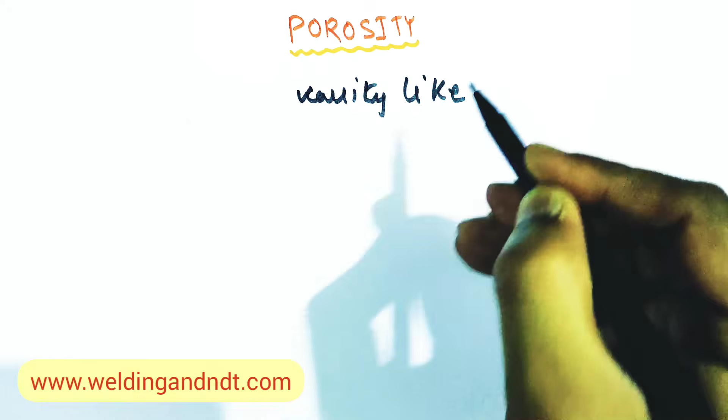Our today's topic is porosity. Porosity is a welding defect, and it is like a cavity - a cavity-like discontinuity formed due to entrapped gases in the molten weld pool.

So suppose this is the drawing of welding. During welding, this weld pool is in the molten stage, and gradually it cools or solidifies. During this solidification process, if some gases are entrapped in the molten weld pool, they remain here itself and form porosity.

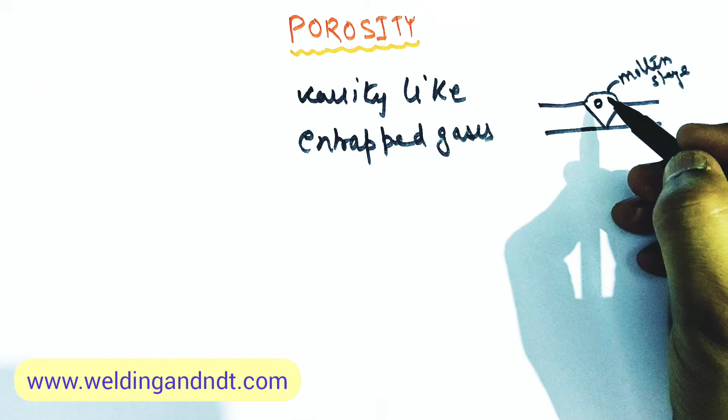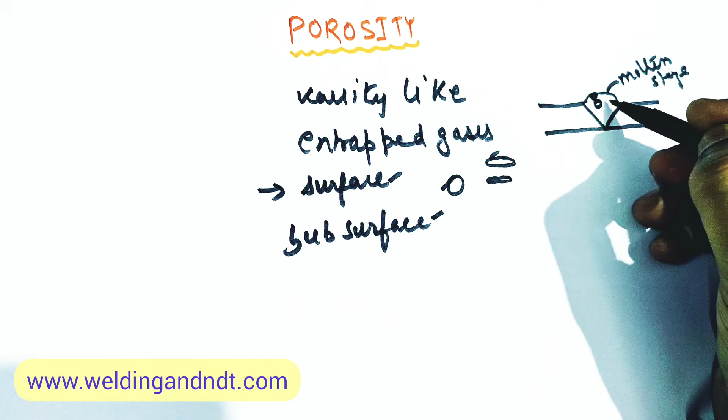This porosity is generally in spherical shape, but it may be elongated also, like this. So it can be spherical or elongated. And a very important thing is that this porosity occurs on the surface or subsurface mostly - at the surface the cavity will be formed, or right below the surface the cavity will be formed.

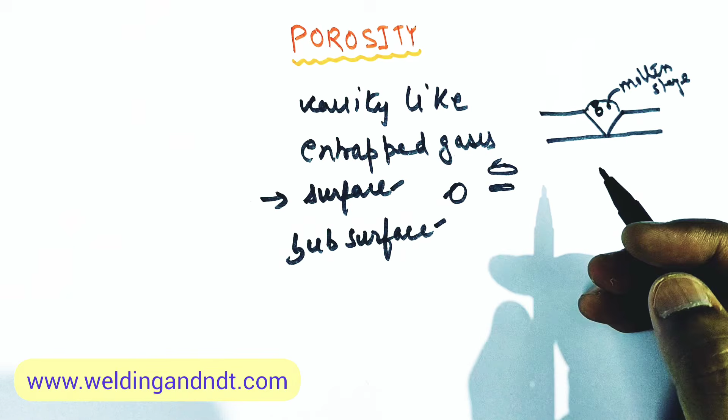So what are the gases which are generally entrapped? That I will tell you. The gases which are entrapped are mostly hydrogen. Hydrogen is the main gas which forms porosity, meaning most porosity is a result of entrapment of hydrogen gas.

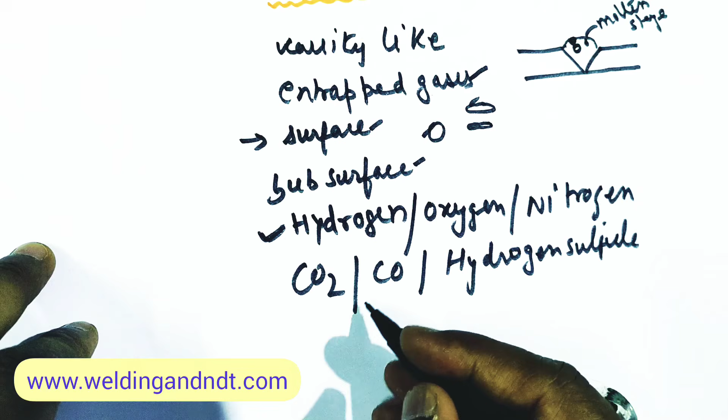Along with hydrogen, some other gases also cause porosity in the weld metal - that is oxygen, nitrogen, carbon dioxide CO2, carbon monoxide CO, hydrogen sulfide H2S, then argon and helium. These are the principal gases which cause porosity in the molten weld pool.

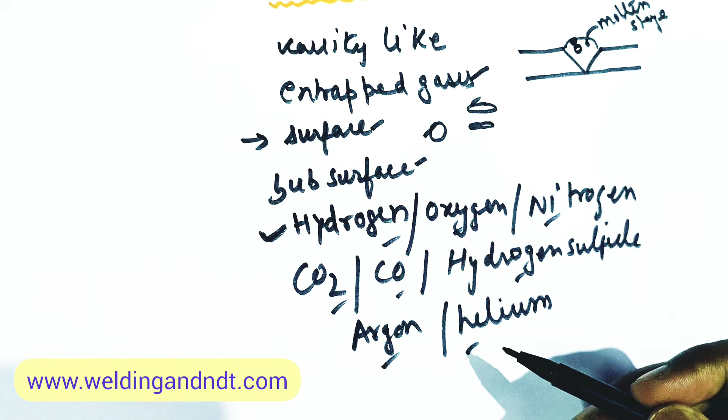As I told you, this hydrogen gas is the major cause of porosity. So please remember this - hydrogen gas is the major cause of porosity.

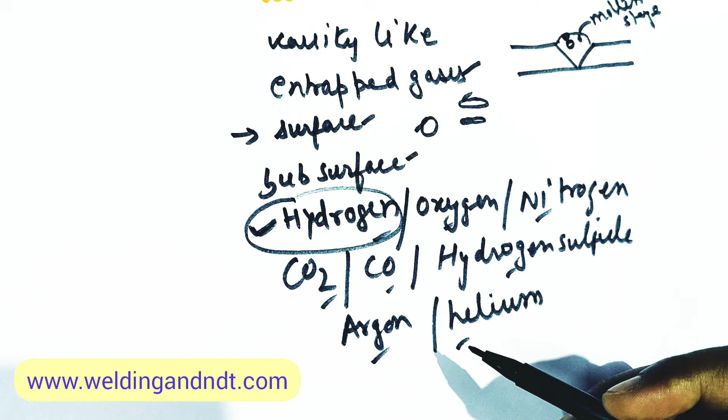Now friends, we'll discuss two more things. One is the types of porosity. There are 5 different types of porosity. I'll name those. First type of porosity is scattered porosity.

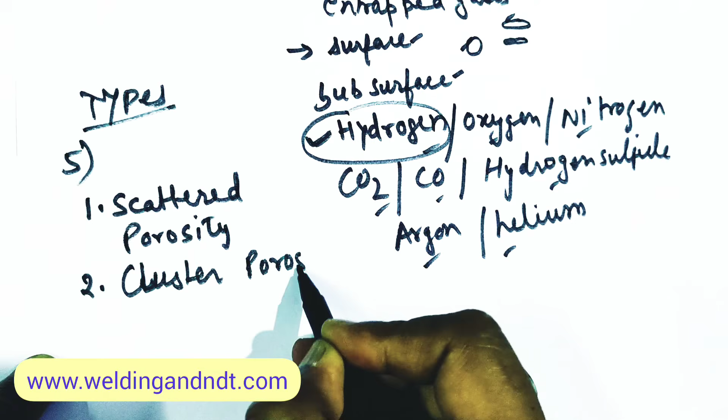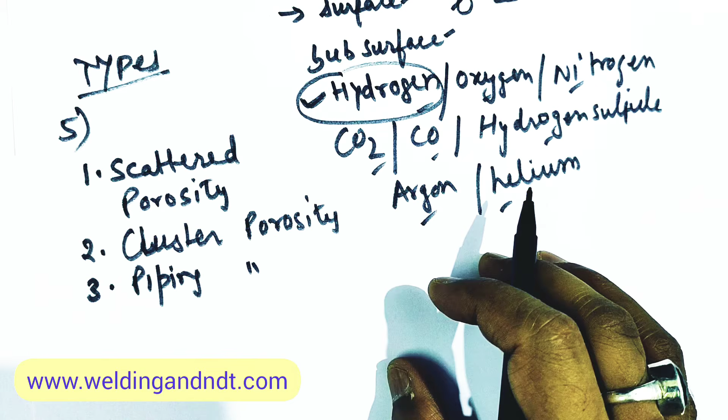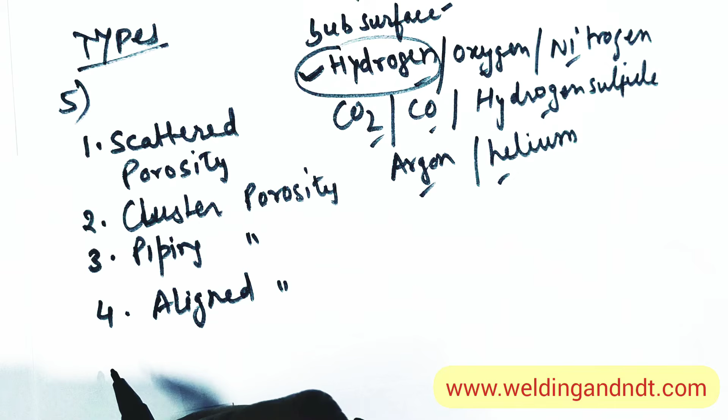Scattered porosity. The second type of porosity is cluster porosity. The third type is piping porosity. The fourth type is aligned porosity. And the fifth and last type is elongated porosity.

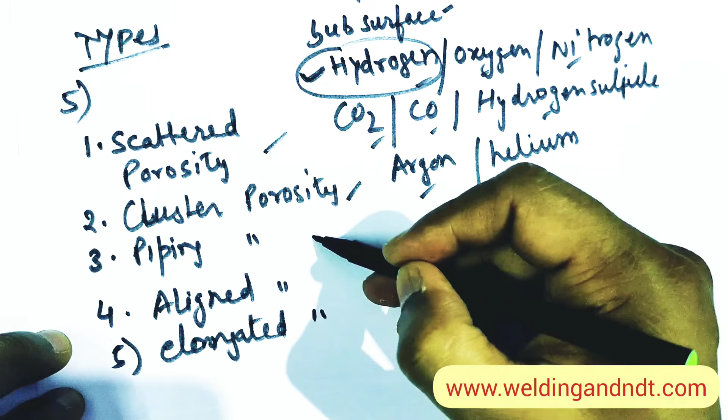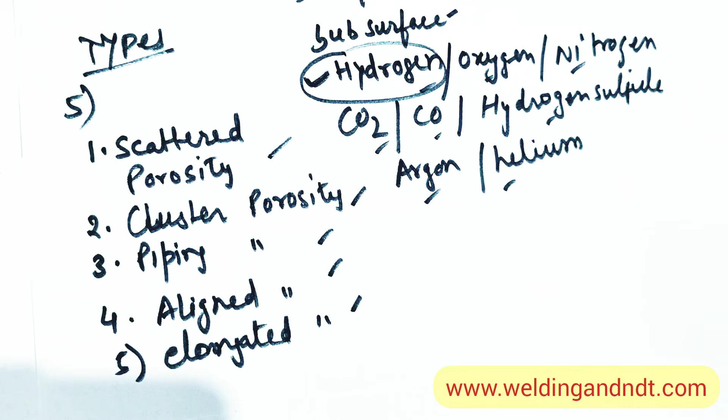So these are the 5 types of porosity which occur in a molten weld pool. I'll explain these porosities also, but first let me explain the causes and remedies of porosity, then I'll explain these 5 types.

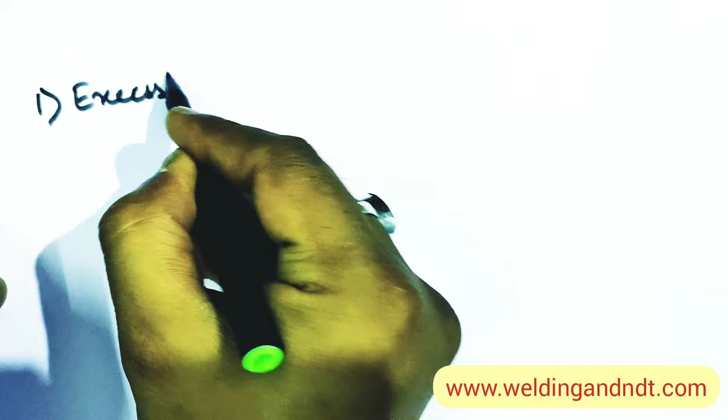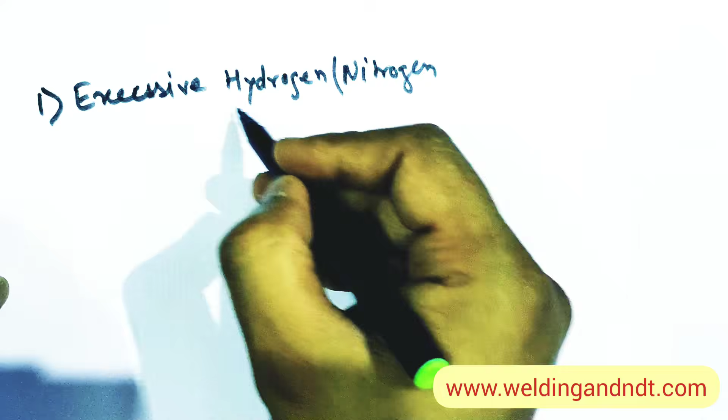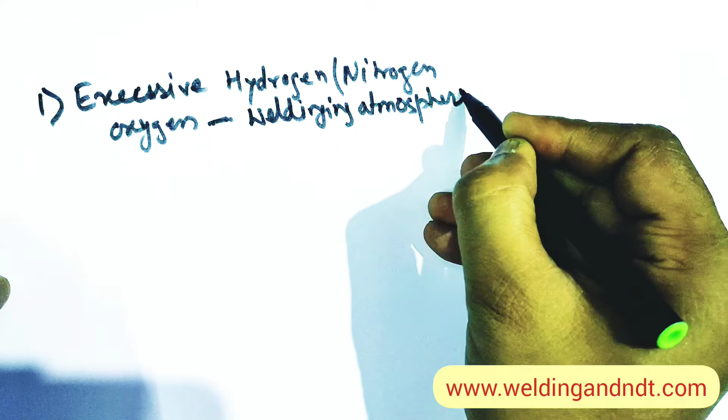So the first cause is excessive gases like hydrogen, nitrogen or oxygen in the atmosphere or in the welding atmosphere. At the position where we are doing the welding, if there is excessive hydrogen, nitrogen or oxygen, then chances of porosity will be there.

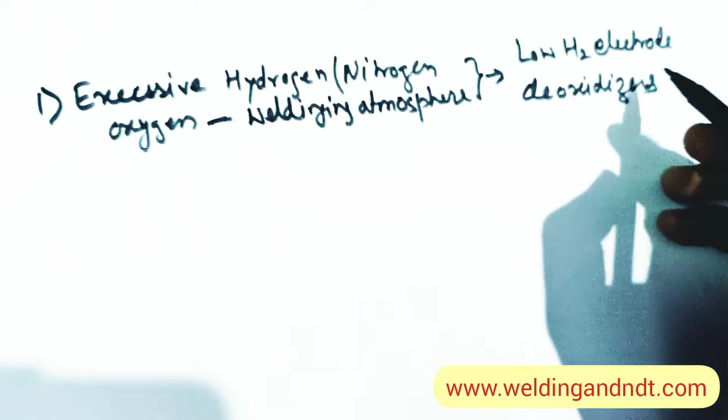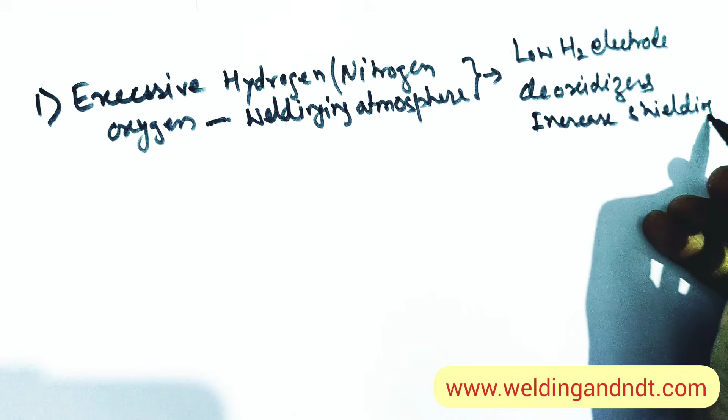Now what are the remedies for this? To avoid this, we can use low hydrogen electrode. We can also use other filler metals which are high in deoxidizers. And we can also increase the shielding gas - by increasing the shielding gas, we can remove the excess hydrogen, nitrogen or oxygen present in the atmosphere.

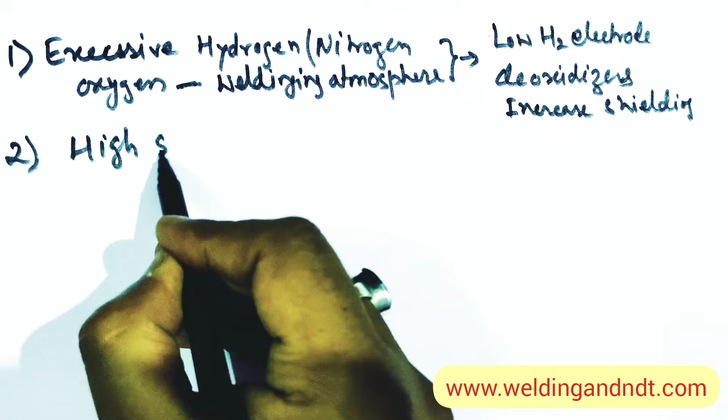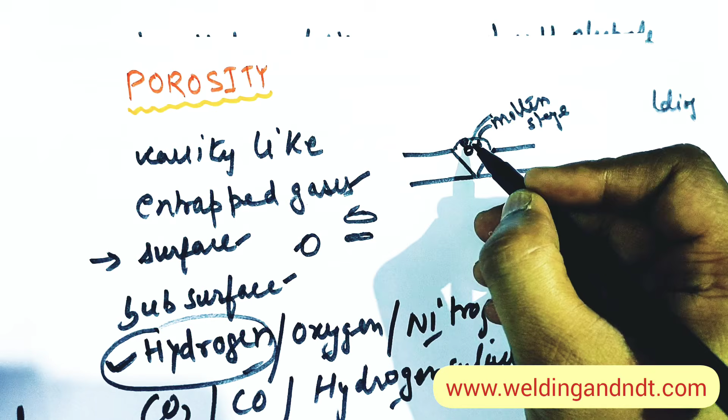The second cause is high solidification rate. If I say high solidification rate, it is like - suppose some gas is entrapped in the molten weld pool, this gas tries to escape. If this weld pool remains molten for a long period of time, the gas will automatically escape and chances of porosity will be less. But if it solidifies very fast, then this molten weld pool or entrapped gases will not get a chance to escape.

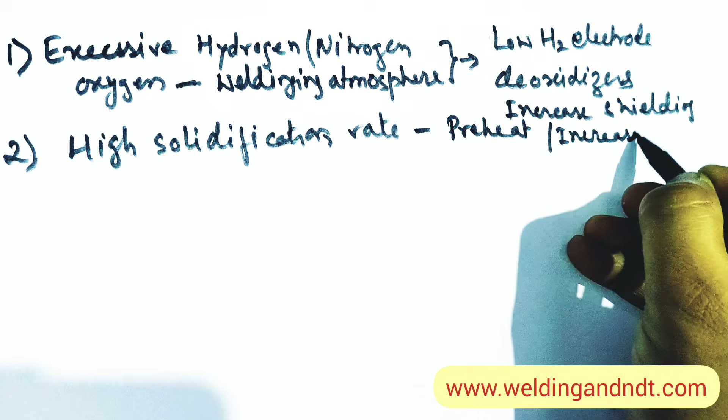So high solidification rate is one of the causes, and the remedy for this is preheat. Either we can preheat or we can increase the heat input, so by increasing heat input, we can avoid this.

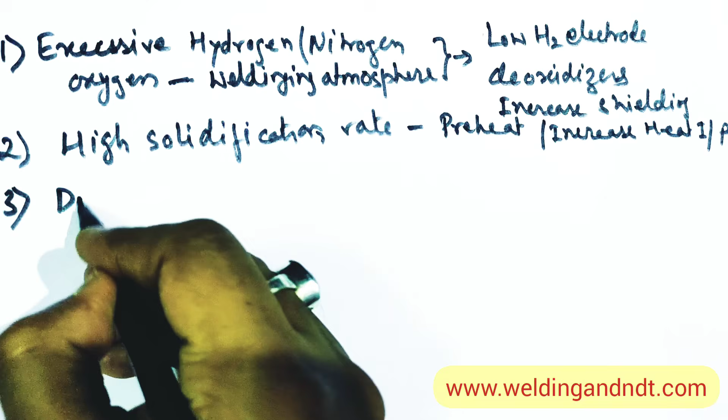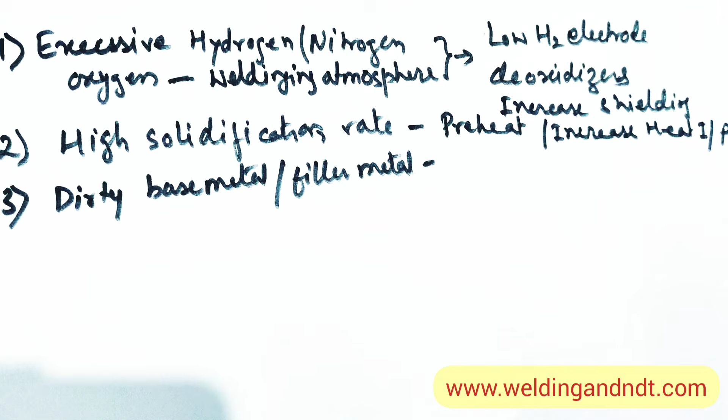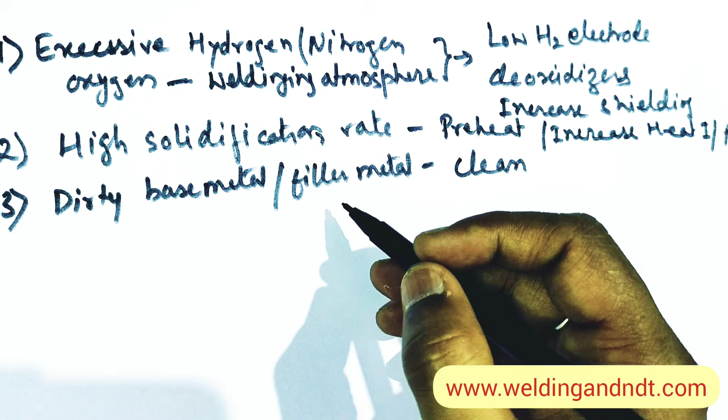The third cause is dirty base metal or filler metal. The filler metal or base metal which we are doing the welding with might be dirty, not clean. Some compounds will be there which form gases, and those gases will be entrapped. So we have to clean the base metal as well as check the filler metal, that it should be free from dirt, grease, every foreign material. The remedy is to clean before welding, clean the joint faces, and in case of filler metal, use packaged filler wire, stored in a very confined place.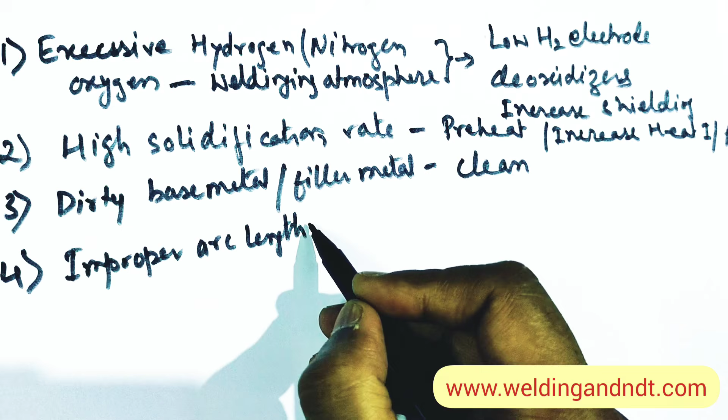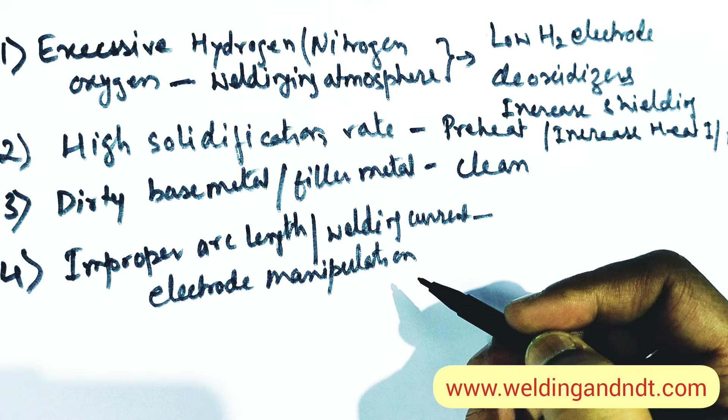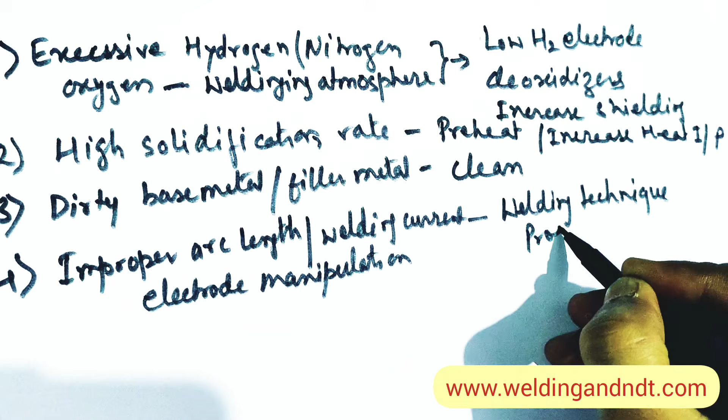So the fourth cause is improper arc length, welding current, or electrode manipulation. This is also one of the causes, and if such thing is happening, you can change your welding technique and procedure to avoid this.

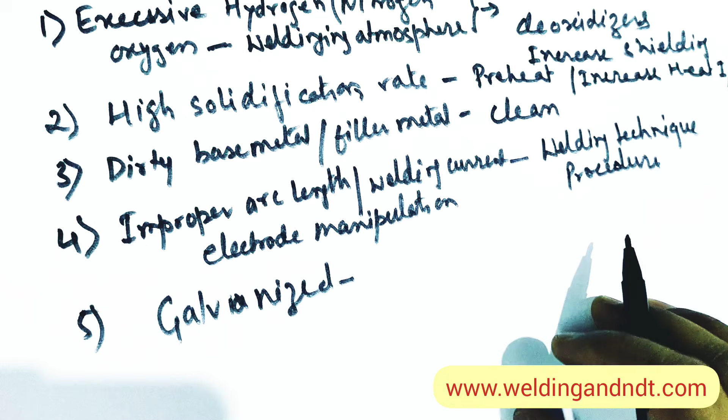Now the fifth one is galvanized steel. If the steel is galvanized, then first remove the zinc from the steel, then do the welding.

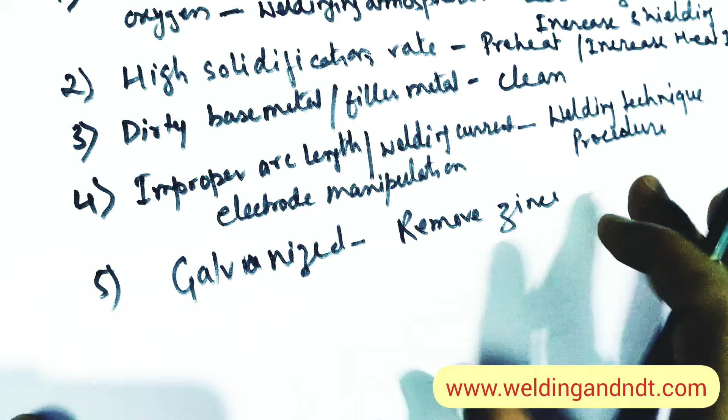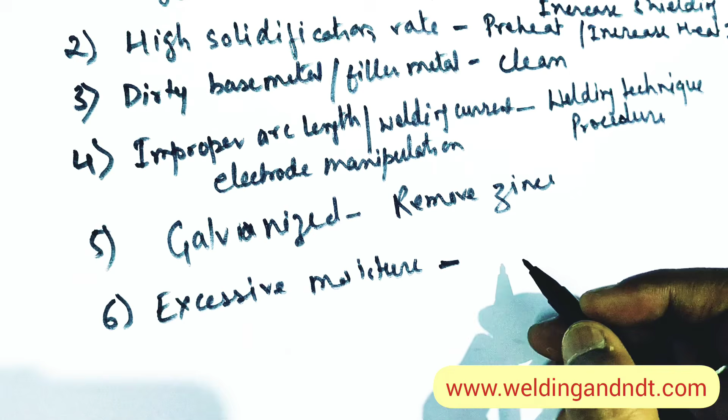And finally, the sixth and last cause is excessive moisture in the electrode or base metal near the joint. This excessive moisture must be removed, and baking and storing of electrodes should be in a controlled manner. Also, if you preheat the joint, the excessive moisture will be removed.

Now friends, these are the causes and remedies of porosity. Now as I told you about the different types of porosity,

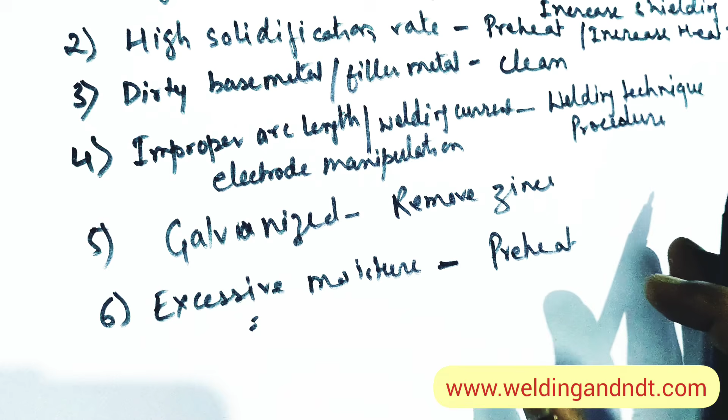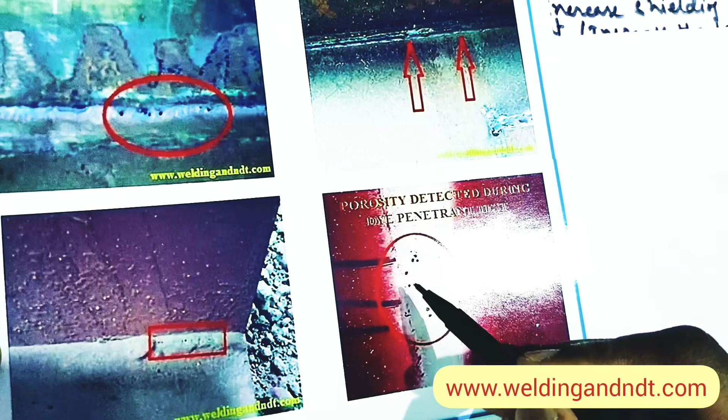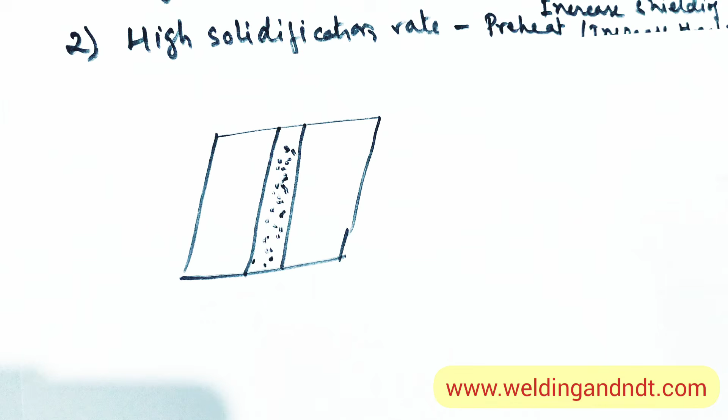Friends, before explaining scattered porosity, let me show you the photograph of porosity. Here you can see this porosity on the surface, the cavity or the entrapped gases which have come out during solidification. Here also you can see the holes, pores, and here these porosities have been revealed or detected after a dye penetrant test. So these are the porosities, entrapped gases which have formed porosity.

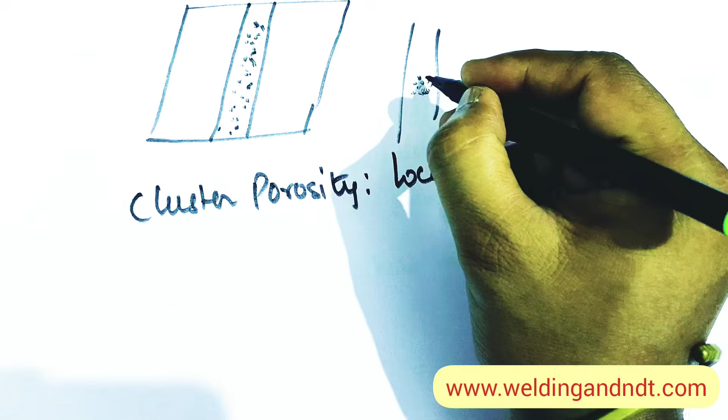Now this is scattered porosity. The second porosity which I told you is cluster porosity, a very famous name. In cluster porosity, actually it is a localized grouping of pores or porosity. So some pores will be localized at a single place, confined at a single place. Like this is our welding, so here pores will be confined, many pores. So this is cluster porosity.

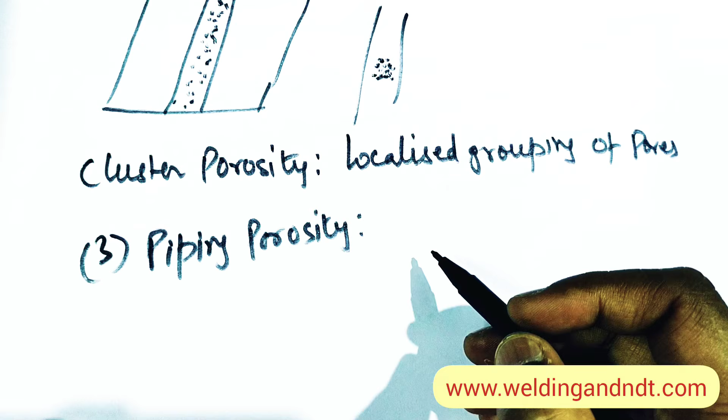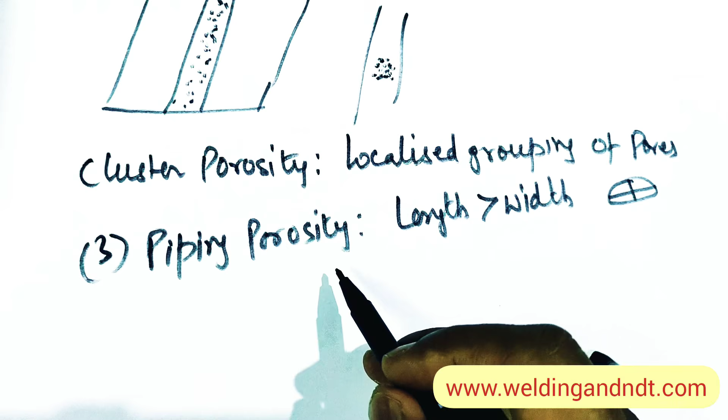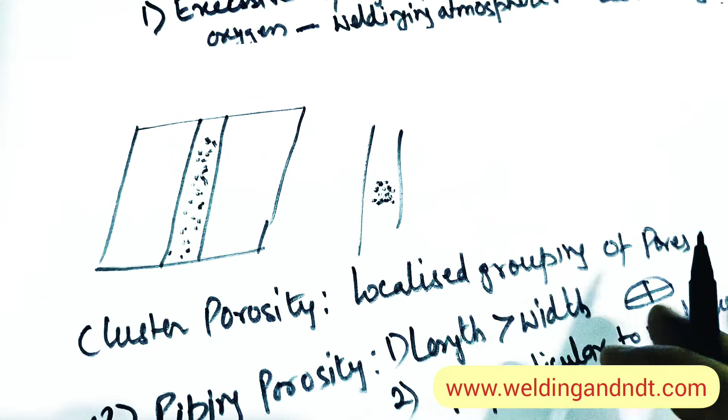Now the third type is piping porosity. Piping porosity is a porosity whose length will be greater than the width. If the length of the porosity is greater than the width, then it will be a piping porosity. And one more condition is there, this is the first condition. The second condition of piping porosity is it lies approximately perpendicular to the weld face. Suppose this is our welding, then this is the face, so it lies like this, in this manner, perpendicular to the weld face.

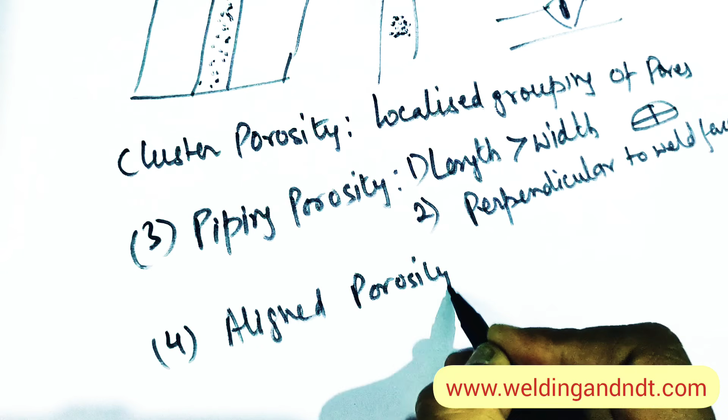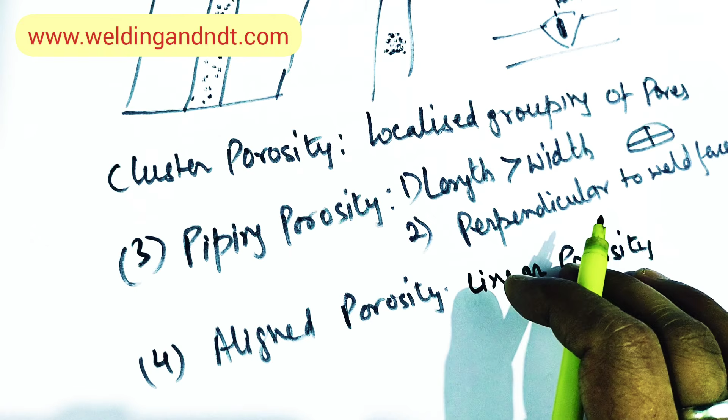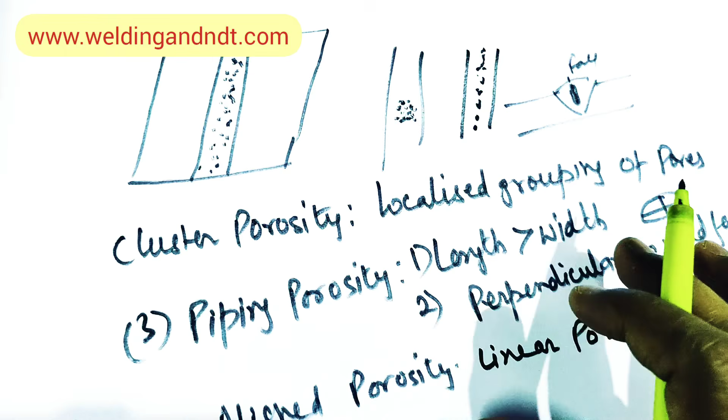This is piping porosity. Now the fourth one is aligned porosity, also known as linear porosity. From the name itself you would have understood. This is a localized array of spherical or elongated pores oriented along the line. Suppose this is your welding, so the porosity will be oriented in a line along the weld. So this is linear porosity.

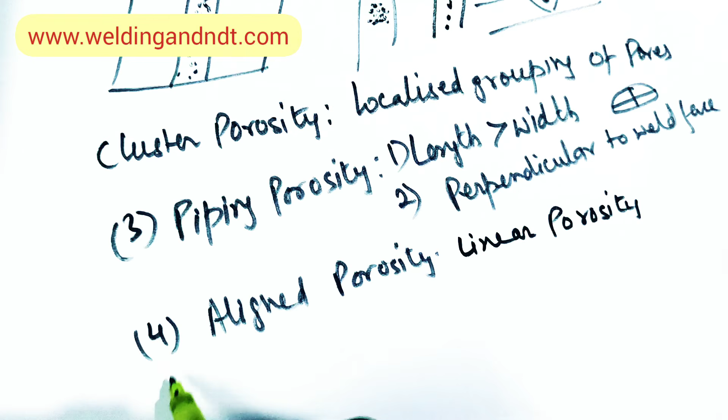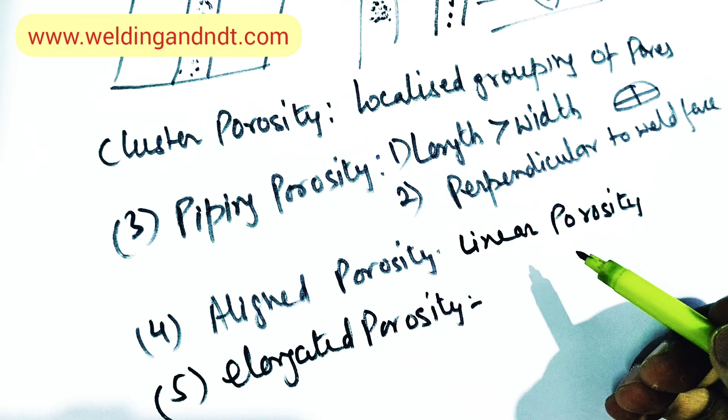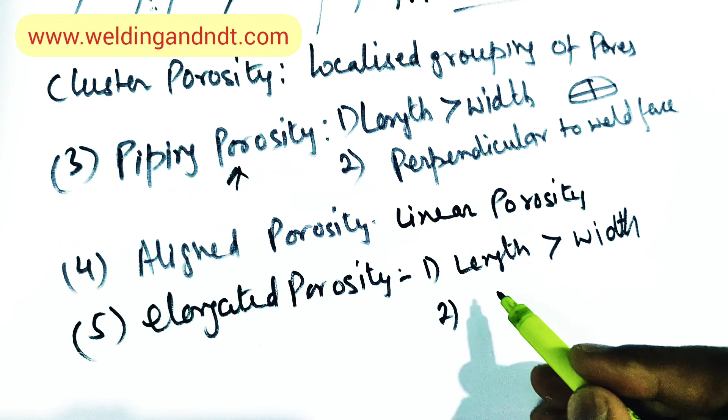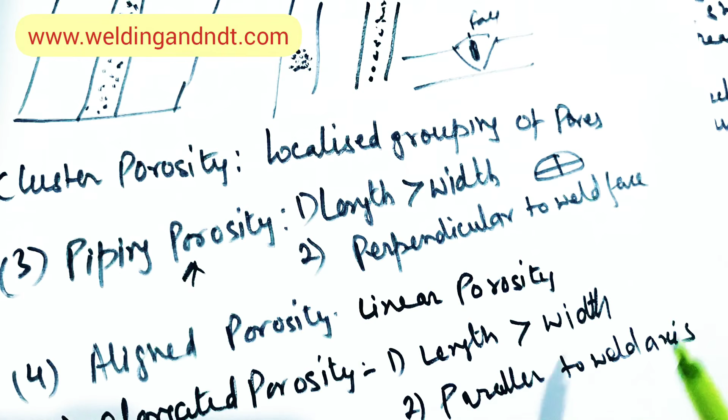Now finally we have elongated porosity, the fifth one. Elongated porosity resembles piping porosity in shape, meaning here also the length of the porosity will be greater than the width, but it lies parallel to the weld axis. The second condition is that it lies parallel to the weld axis. Here this was perpendicular to the weld face, and this is parallel to the weld axis. If this is our weld axis, then the elongated porosity will be oriented like this.

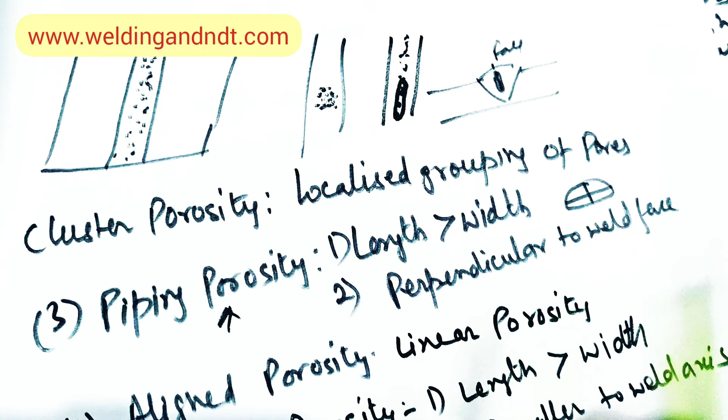So friends, these were the 5 types of porosity.